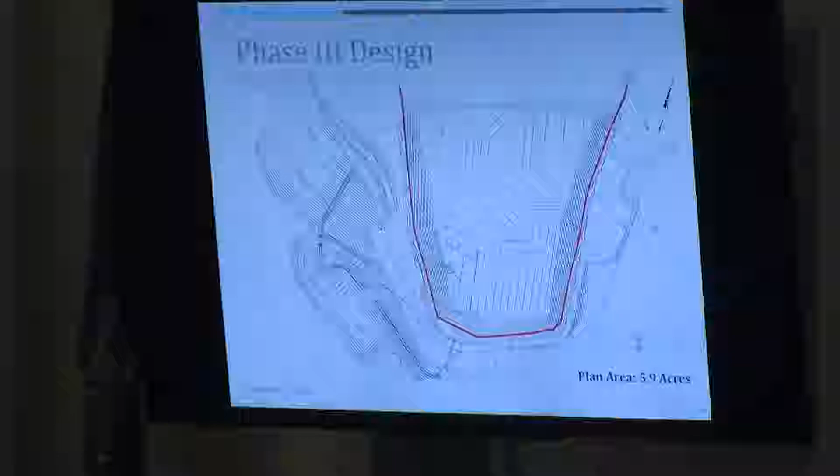What happens if we get approved and we're kind of in the middle and the regulations change? Sure, excellent question. Once you're approved and you have your permit, you're under those rules. If you wanted to make a change to the facility, depending on what the change is, if there's a rule change associated with that modification, then you'd have to follow the new ones. Because we're sending a different amount of water to the pond, we had to upgrade the rules on that. So once we get the permit in hand, we're golden. Okay, thank you. You're welcome.

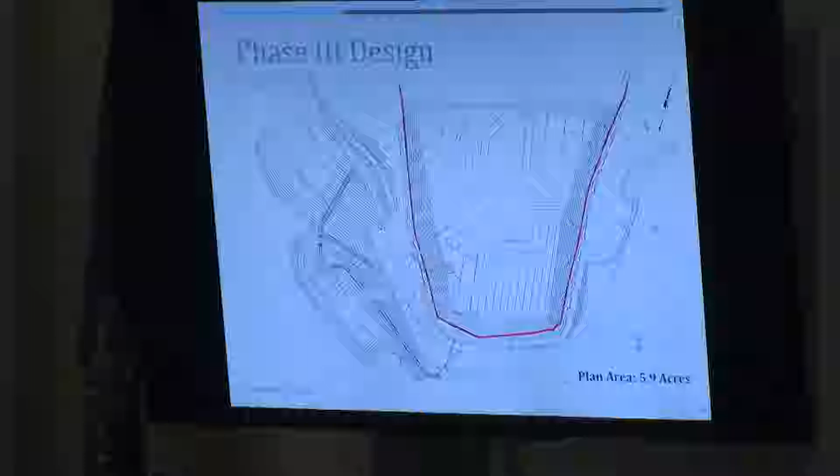And where is the pond that... let me go back, I'm sorry. The pond is here. It's the same location Pond 6 is now—we just had to upgrade it to meet the current rules.

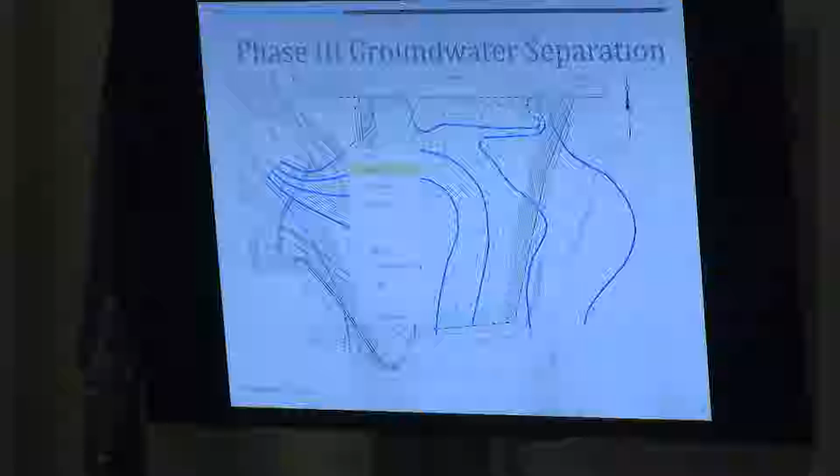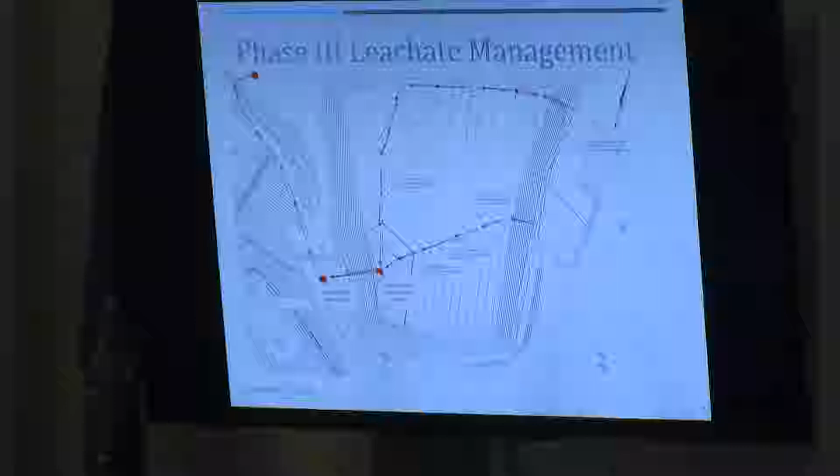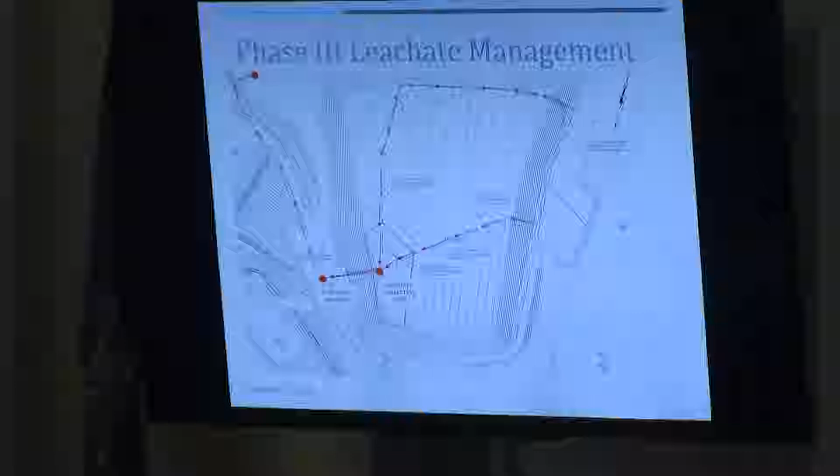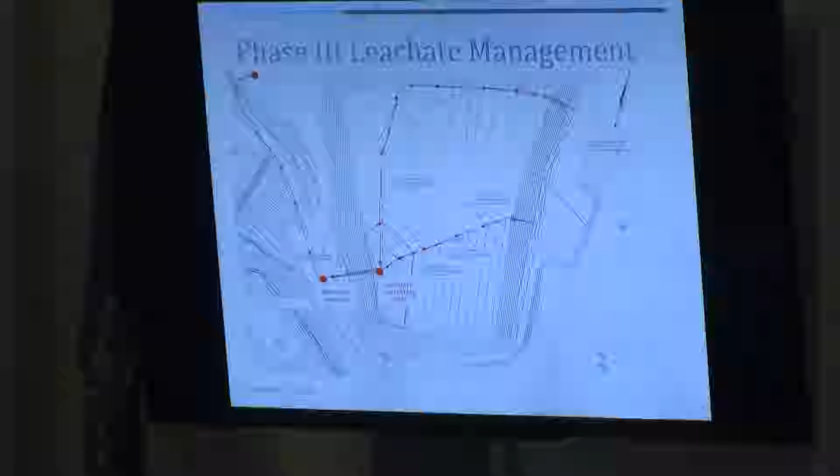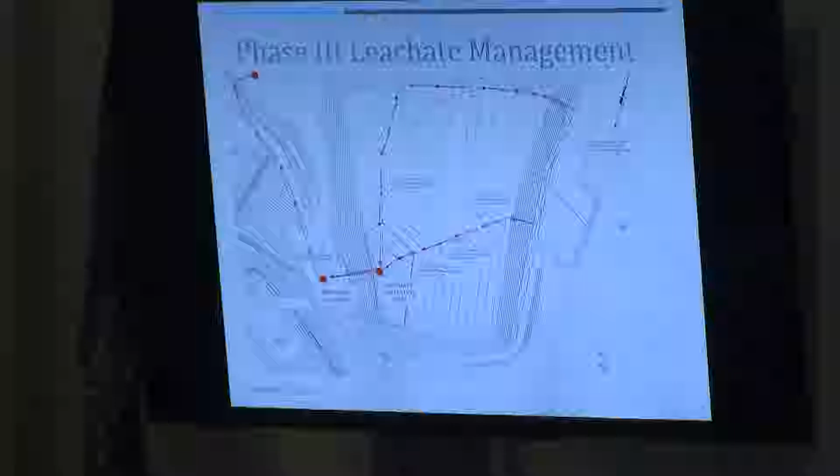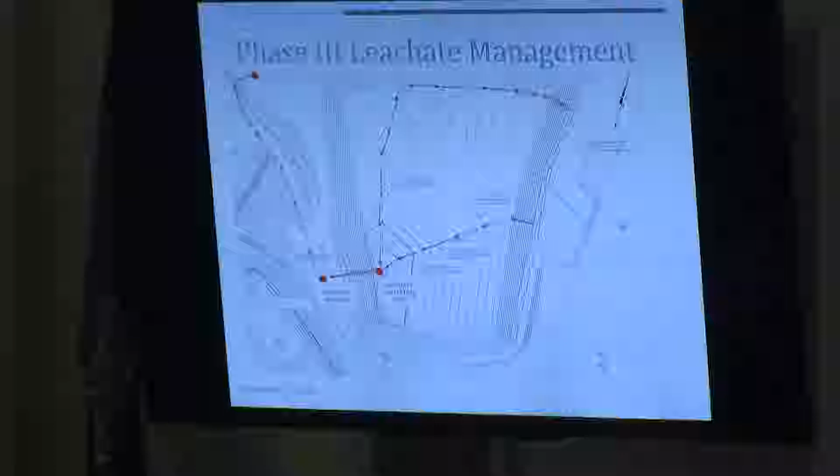The pumping network will pump it all the way up to the top of the hill, where we'd change from the force main pumping piping to a gravity main, and it would drain back in a pipe to this area of phase 2, where there's already plumbing to bring that phase 3 liquid to the existing system. Originally when designed, the low spot was supposed to be in this area, but because of the groundwater, we had to flip the grades to meet the rules. We're still trying to use as much of the existing infrastructure as we can without placing a lot more pipe at the landfill.

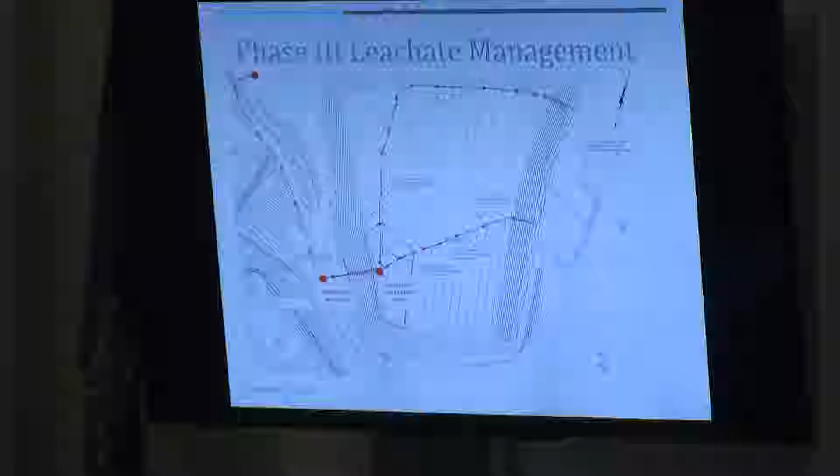So as I mentioned before, we have to have... did you have a question, sir? Yes, very quickly. We're taking, what, rainwater that flows into the thing and pumping it out of the...

So any water that comes in contact with waste, by rule, is considered leachate, and that has to be handled separately than stormwater. Any water that's outside the limit of waste, that doesn't touch waste, is stormwater. Anything that falls within the limit of waste or on the waste itself, we collect as leachate, and they're handled very differently.

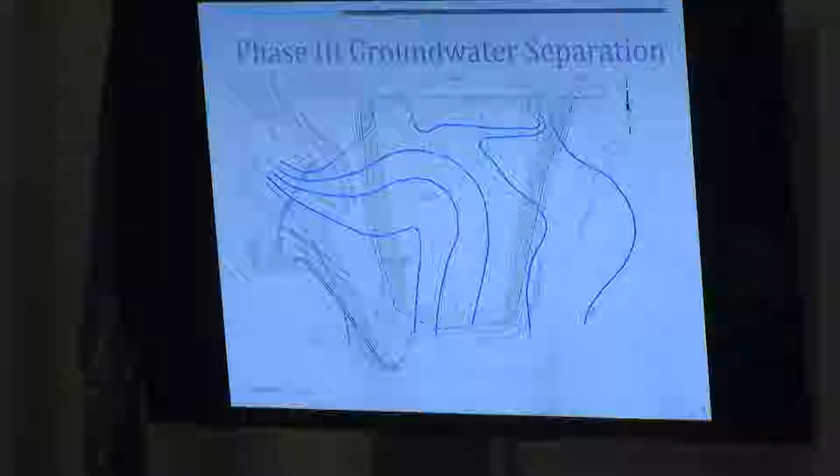This graphic here is the same grading plan we were looking at before. The blue lines represent the groundwater contours, and the green lines are computer modeling to see the difference between the top of that groundwater and the bottom of the landfill, which we have to have a 6-foot separation by rule. So we set up our grading plans to meet that rule.

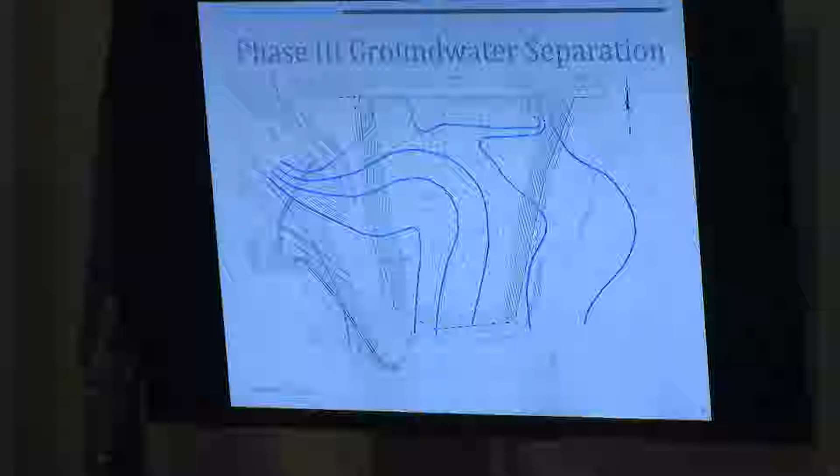It's been a wet year. Groundwater table has risen since we did this, so one of the conditions of the permit is to monitor groundwater and make sure we have that separation. We're in the process, the city's been monitoring that. We have to take that monitoring through June of 2019 and show the state that we have the separation. So the grades might change a little bit to reflect if the groundwater has changed appreciably, to make sure we have the separation.

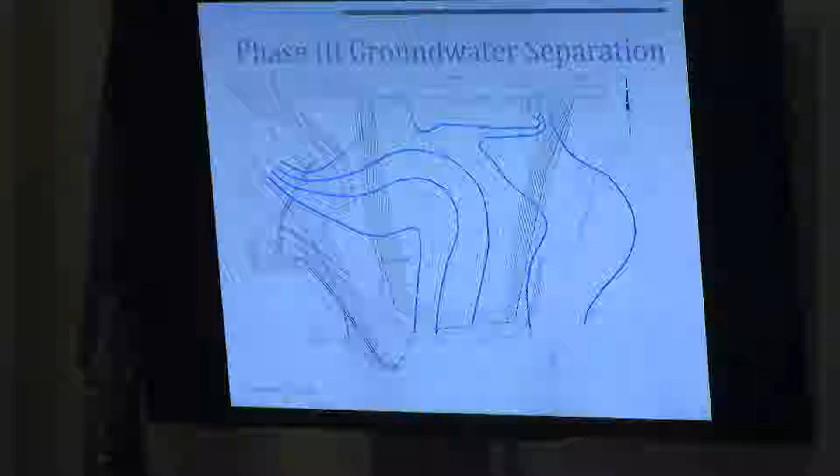Yes, sir, Alderman Jetty again. Can you explain this line right here? So the blue lines are showing the contour of the groundwater. Is that groundwater high or low? Yes, so the blue lines are like topography lines for groundwater.

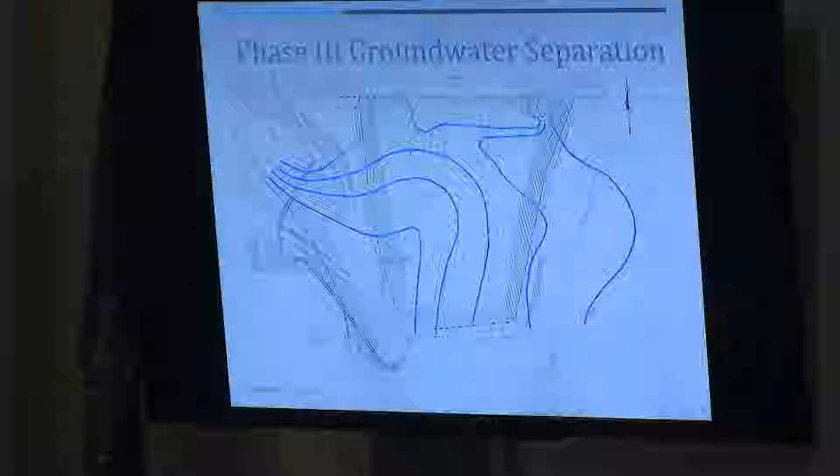So what you have going on is the low of the groundwater is down here. That's why we put our sump there, because we can go down lowest and get the 6-foot separation. These curved lines here are just other 10-foot contour lines of the groundwater, with the highs being off on the edges on either side. So the water kind of flows from the edges into the landfill footprint and then down, so it's all flowing downward.

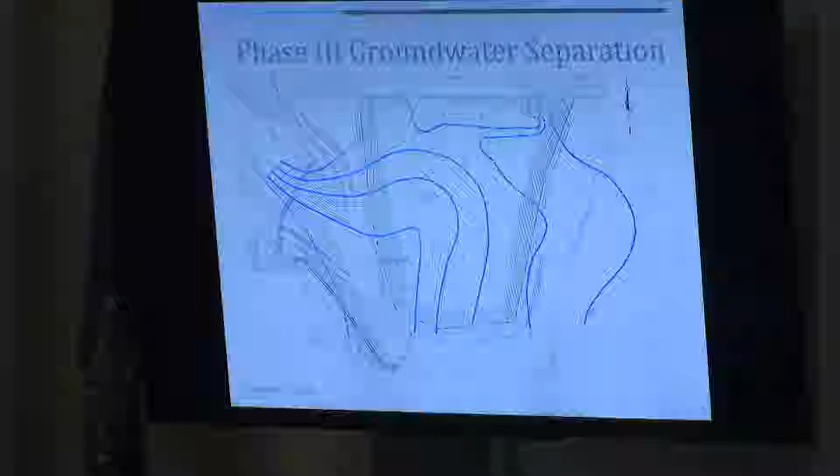The line up here... I'm having trouble following your cursor, I'm not seeing it very well. Where's the low point again? The low point's down here at the sump. Okay, I see it now. Yep, thank you. And those are 10-foot contour lines as you go out from there.

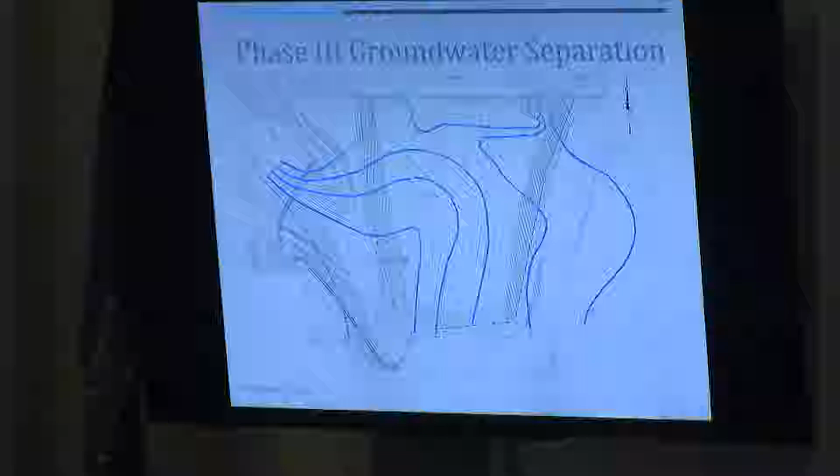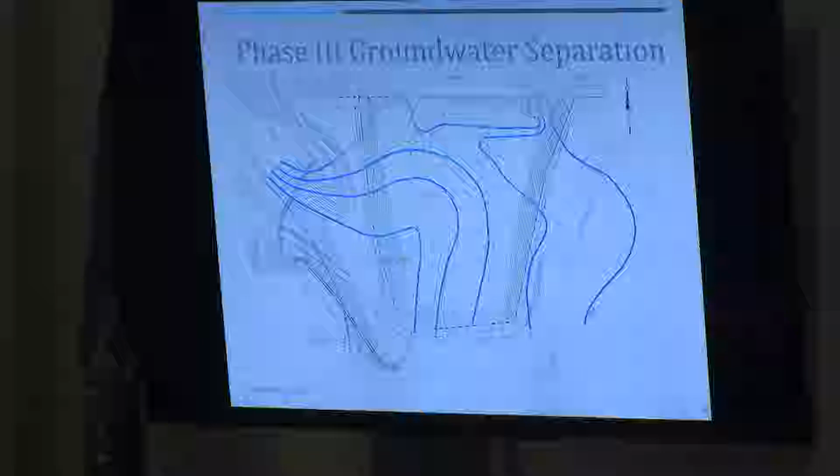So all those yellow dots I showed on several slides ago, those monitoring wells, we gauge the groundwater elevation on a monthly basis, and that's how we come up with the groundwater contours here.

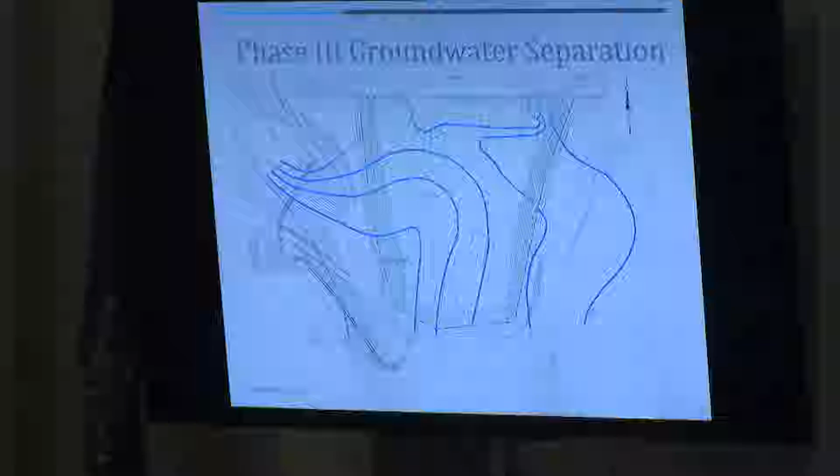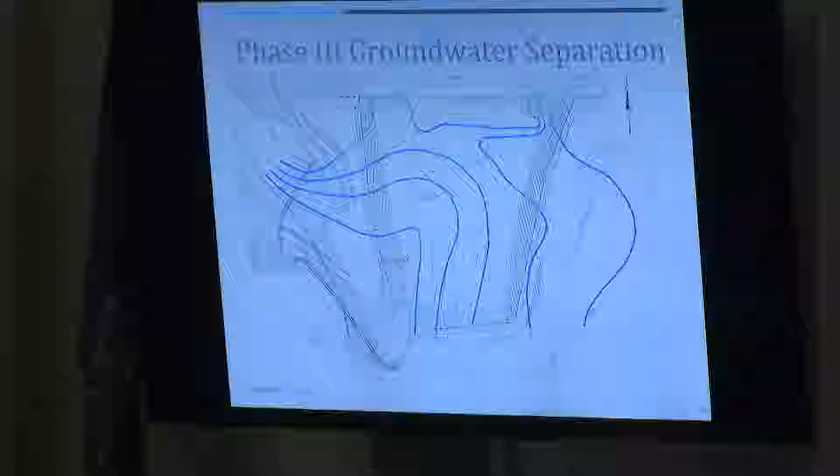And is this within, like if you go down that main road, so when you enter from West Hollis Street, and you go to the back and you take a right, and you go along where the demolition area is, and then you take a left and you kind of go up, where is that? Let me show you, kind of answer that question here.

So phase 3 is bottom right on the page. Alderman Jettie, if you go all the way up the haul road and where we're currently working on the right, up behind that, it will be phase 3, in this area here. Okay, so right behind phase 2 where we're currently working.

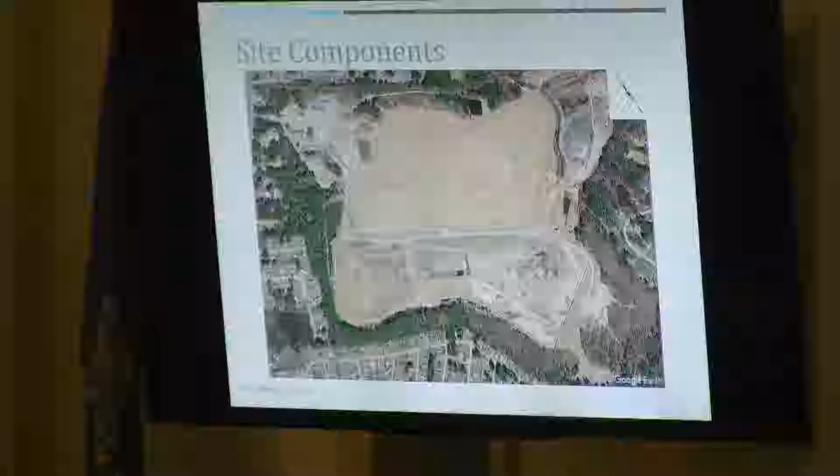Okay, so it'll be behind. That's not very far from those houses on like Pioneer. Right, that's why... let me just go a little bit here. Actually, it was probably better back here.

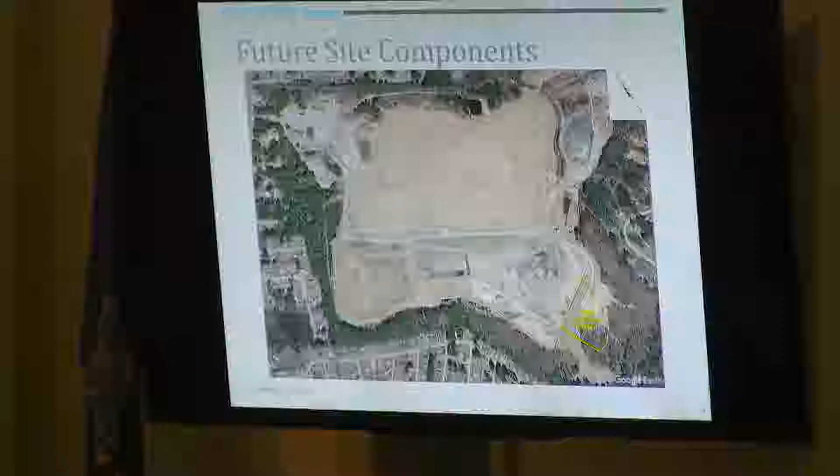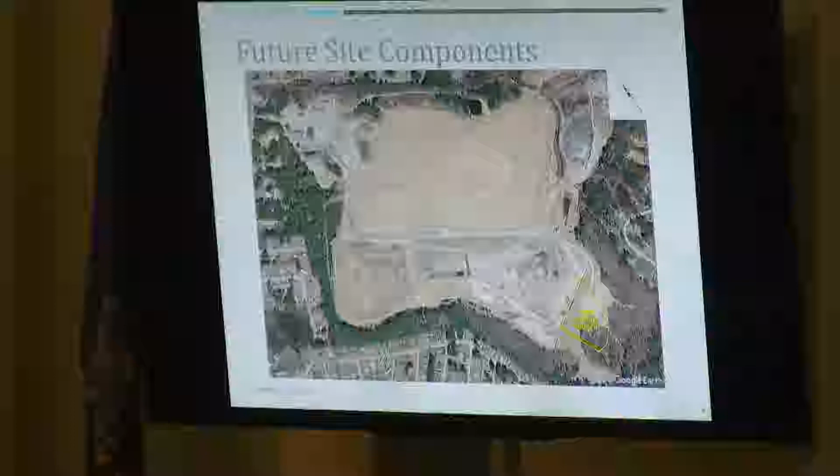So those yellow lines, for phases 1 and 2, represent the 500-foot setback from those houses. If you continue those lines down here, that's the boundary for phase 3. That yellow line is the 500-foot line, the edge of waste we'd be allowed to place, which is 500 or more feet from the residences. That's a state requirement.

Phase 4, right in the middle of the site, is well away from the 500-foot setbacks.

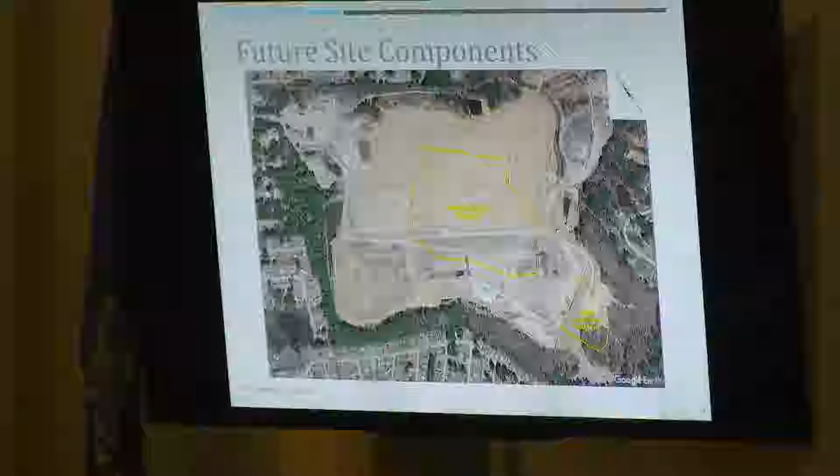When it was originally permitted, phases 1, 2, and 3 were permitted as one package. We're modifying it to adjust for that vertical wall issue, which I'll show in a second, as well as for the groundwater table.

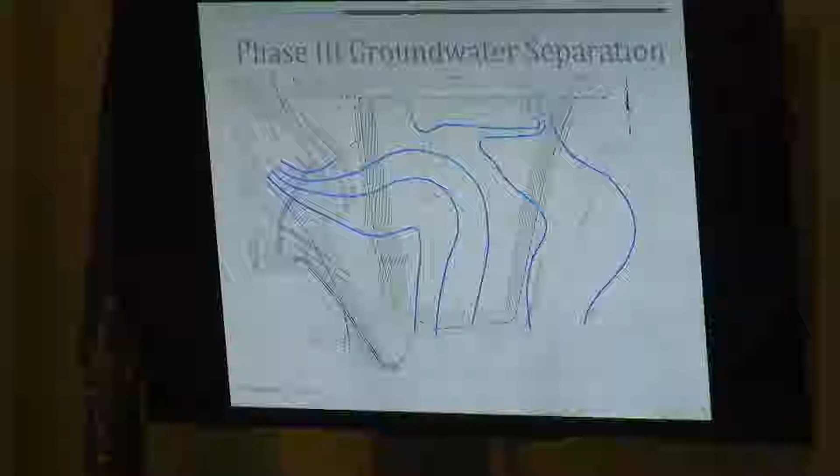So onto how we're going to build this. It's a pretty straightforward landfill construction project. Some earthwork, and then we put down synthetic materials for barrier and drainage layers. It's multi-level, 2+ feet thick in total, with a perimeter berm around the outside constructed out of soil.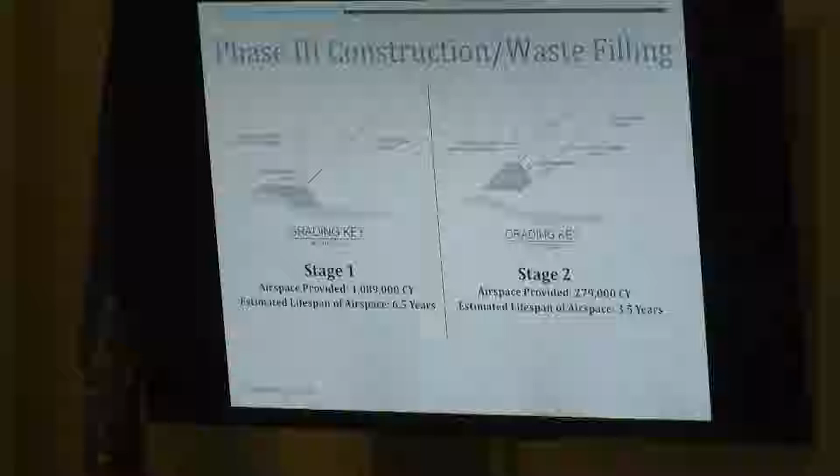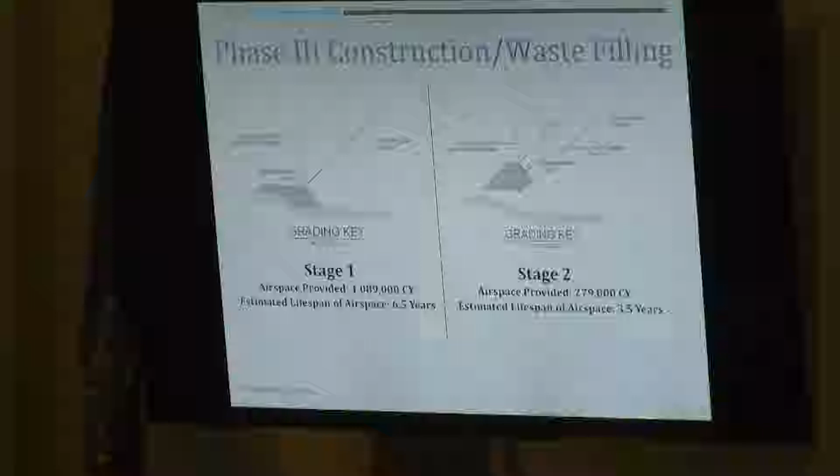Thank you. Great. So stage 1 would be built this summer, and that's that 6-acre area within the 500-foot setback. There's just over 1 million yards of airspace for disposal capacity based on where the bottom of the landfill is and a 3-to-1 side slope from our berm, that box we'd make. Based on your current disposal, your waste stream coming in, and the compaction efforts we're able to give it, that's about 6.5 years of capacity there.

About 5 years out, after you start filling it, we'd go to stage 2. Stage 2 builds more soil berm along the outside, and we'll place more liner material so all the waste stays inside that limit of waste, this dashed line you see vertically here. You get another 280,000 cubic yards, or another 3.5 years of capacity. The construction there would mostly be the soil berm and some more liner system, but not as extensive as the construction we're doing this year, which has the pumping systems, all the piping, and the pond that goes with it.

Quick question. Commissioner Ackerman: 1 million cubic feet lasts 6.5 years, but 280,000 lasts 3.5 years?

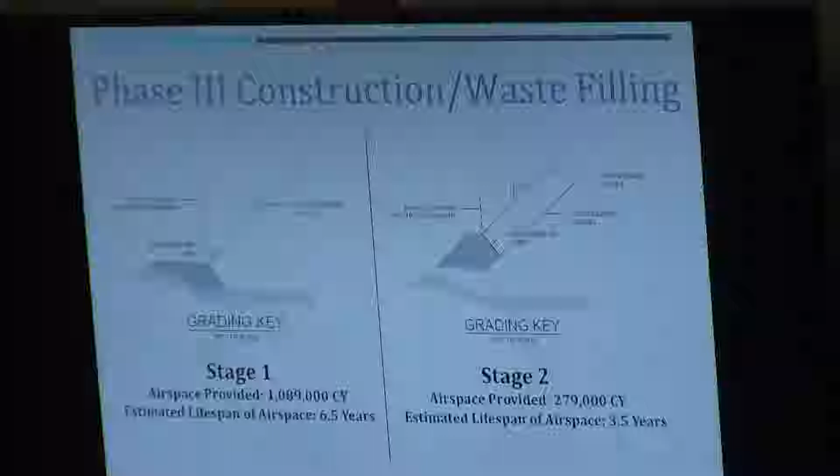Cubic yards. Yeah, that's because as you start a new landfill, your first lifts are placed looser because you don't want, we call it select waste, we have to be protective of the liner systems. You don't get as good compaction in the early years because you don't have the thickness of waste. As we go longer, you get settlement of the waste, it settles down, so you're getting some of that capacity back. We look at what we call an airspace utilization factor, doing math based on your tonnages and the historic placement we've seen. Every time you open a new cell, your compaction isn't as good, and as you go through the years, it improves over time.

Yes. And all these phases are going to be included in the permit that we're going to receive? So the original permit included phases 1, 2, and 3.

The way the state works, when you're ready to build the next phase, there's another application for construction, called a Type 2 permit. Phases 1 and 2 are built, they're active. Phase 3 we didn't need yet, so you don't build what you don't need. But capacity is running out in the landfill, so we need to get it built.

To get permission for construction, there was another permit application to modify the original one. So that's what we did. We prepared an application over a year ago and went to the state, showing the modifications we're making to bring everything up to current code. Because we are modifying it, we had to go through alteration of terrain with the Department of Environmental Services as well. So all those permits are in hand.

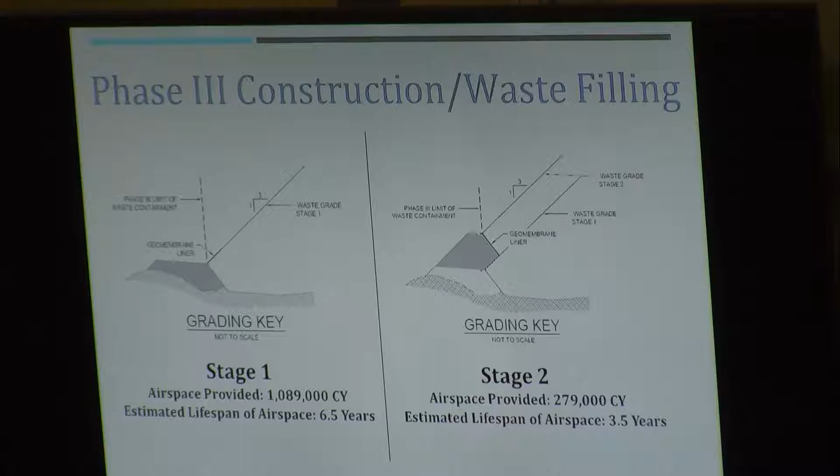Thanks for the clarification. It sounds like they switched their rule, and I understand they have to. So if we get 1, 2, and 3 permitted, like our permit's for, how many years will that buy us? Phase 3 gets you an additional 10 years. I don't remember how much we have left right now. 4 to 5 years. So you'd have 4 to 5 years left if you didn't do anything, and phase 3 gets you another 10.

You need overlap between phases because, like I said before, you want to select the waste that goes on the new liner systems, since you want to be protective of the materials you spent a lot of money to construct. You also want overlap between phases so you can properly move your machinery and have good operational control. So most of our clients look for a year overlap at a minimum. You don't want to build too far in advance, but you want operational security in how you run your landfill.

Brief follow-up question, Commissioner Ackerman. Mr. Steinhauser, looking out beyond phase 3 and phase 4, how many cubic yards? I'll get into that in a moment.

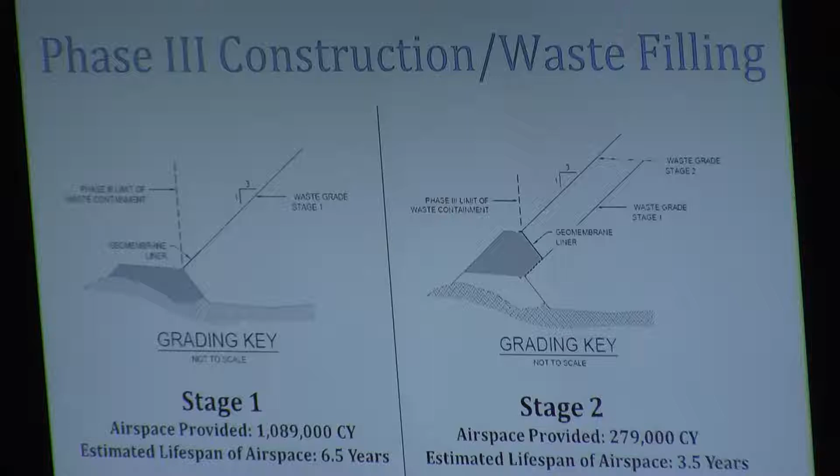Fair enough. What's nice about the phase 3 design is that you build one project now, and in 5 years you build another project, and the city doesn't have to deal with periodic vertical wall construction, because we'd build that perimeter extension in one construction season. Right now they have to put in these vertical barrier walls as they go, and it's disruptive, it delays things, and it hampers how they can do work. Part of our job was to get you as much space as we could and make it operationally positive for the operators.

I brought show and tell materials. In New Hampshire, the rules require a geomembrane material. I have two types to show - two different manufactured materials for that. This is a 60 mil thick, high density polyethylene material. That's what every site in the country and internationally uses. It's textured, for slope stability issues so we don't get sliding of the material. There's a primary geomembrane and a secondary one.

So when this gets built, they'll do earthwork to grade the site to where it needs to be. We'll place a 6-inch thick layer of a low permeability, very dense material. On top of that will go the first layer of this plastic material, and on top of that will go a drainage material - it's kind of like carpet with a drainage net in between.

The textile helps — if you were to put it up against that frictioned plastic, it holds very tight, and that allows water to move through it so we can collect it in the sumps.

On top of that is the primary geomembrane, and then another composite for the leachate directly from the landfill. Then there's a 2-foot thick sand layer, an 18-inch thick sand layer above that, and then waste is placed above that. In the sump area, we have another material, kind of a belt and suspenders.

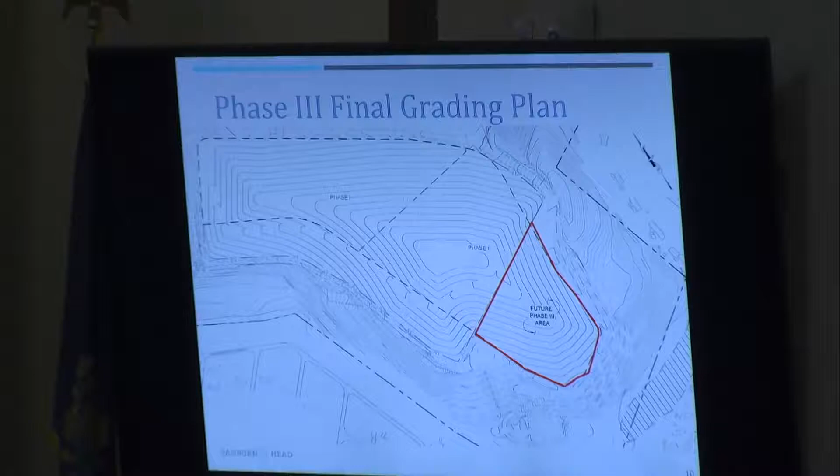Depending on how much waste there is, how dry the waste is, how much rain has happened — the more rain and snowmelt you get, the more liquids are going to come to the sump, the more pumping there would be. The drier the time, maybe the drier the waste, it doesn't pump as much. But it's all automated, and the operations staff can see the operations of the pump and when it's working. There's another level that says if the level gets too high in the sump, maybe the pump hasn't kicked on — there's warnings that go off so the operations staff can pull the pump, put down a replacement, or repair it and make sure things are working.

Yes, sir, Alderman Jettie again.

Has any thought been given to producing our own electricity to operate that, with solar or whatever? We haven't for this project. It's a possibility, a little outside my expertise, but sometimes it's cheaper to buy electricity than to generate it yourself, like at a gas plant where you sell the power back. It's often cheaper to buy it than use it internally. If you make electricity, sometimes it's better to sell it and buy off the grid. I don't know all the economics, but if the city wanted to look into it, we could direct you to people who can help. We didn't look at self-powering those pumps though, they're not real high energy use pumps.

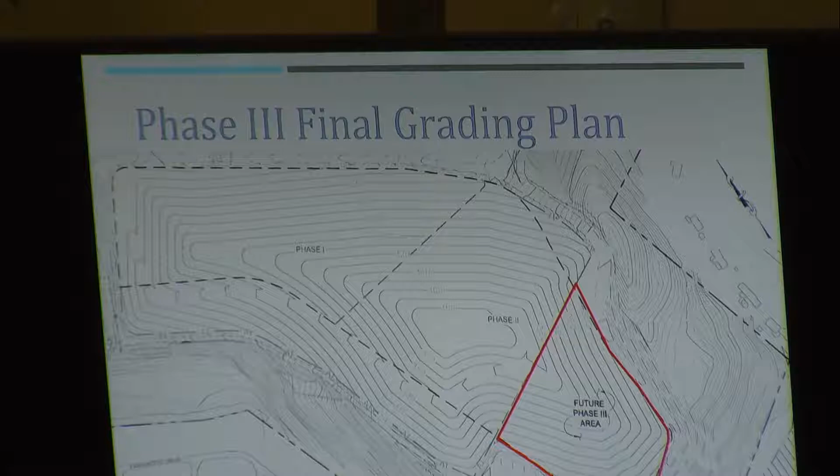Phase 4 would overlay the large unlined closed landfill and a portion of Phases 1 and 2. That application is in process, we're finishing the design work. This would be a new landfill, so it requires a new permit, not a modification like Phase 3 was. We're preparing all aspects the state would want: engineering design, the hydrogeologic environment around it, the stormwater design, and more, all in motion now. Our estimate is 3 to 4 million cubic yards of space. If you've been to the landfill and gone down that road, there's quite a valley, and this overlays that valley.

That's all I had prepared on Phase 4, but I'm happy to address questions. Anybody have any questions? Certainly.

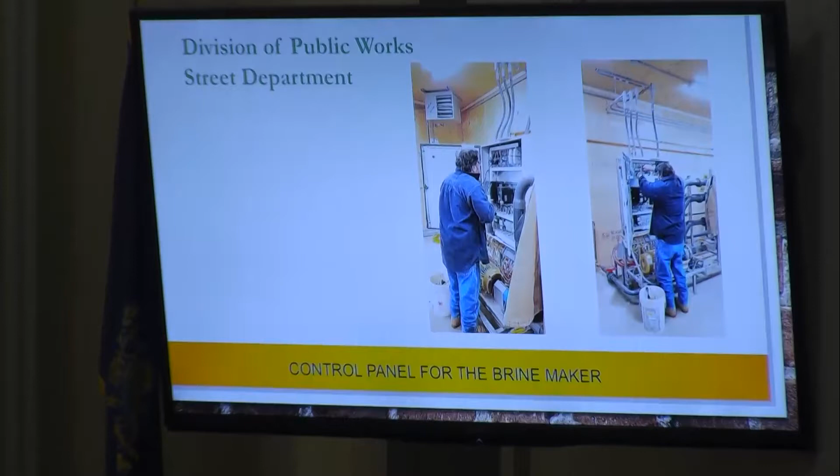This is Eric Gingras, our wastewater electrician. We built this whole project with street and wastewater and actually school department staff. Gary Connors was kind enough to work with me and supply Lyle Samard, who did all the plumbing for the facility, which kept our costs down. And Dave Boucher, wastewater superintendent, was able to part with Eric.

We had to work around their schedules. Obviously, wastewater has to stay operational, but every time I could get him out, he'd come out and work on this for us. That control panel he was working on in that slide, that's the component that Henderson is rebuilding and sending so we can program that machine.

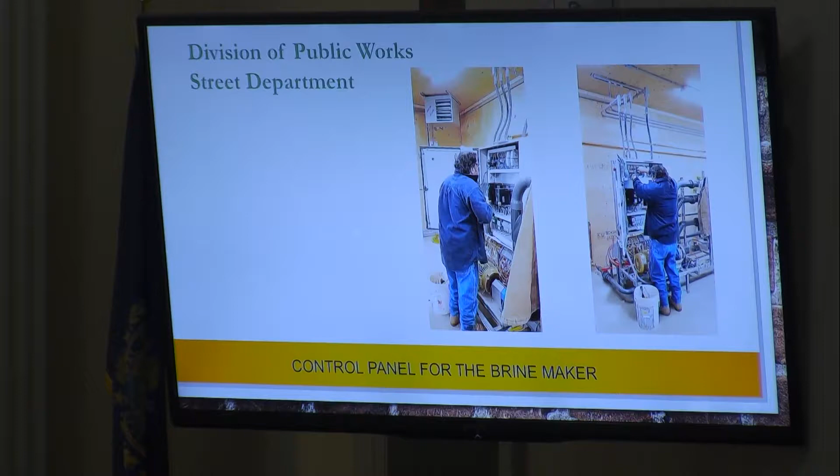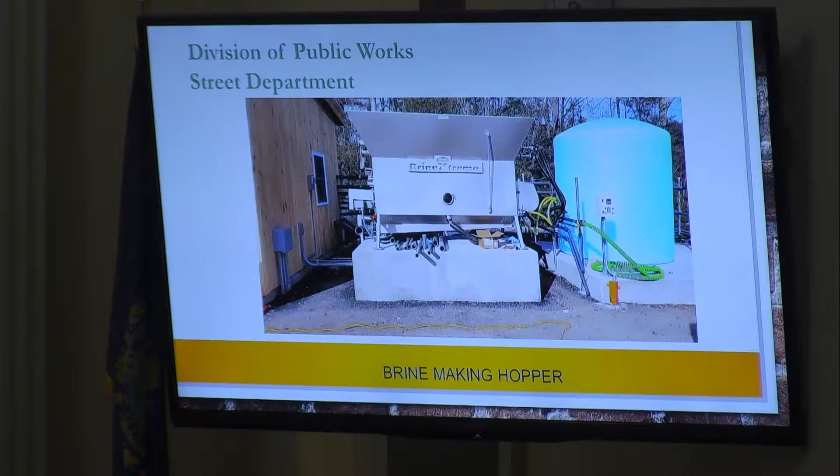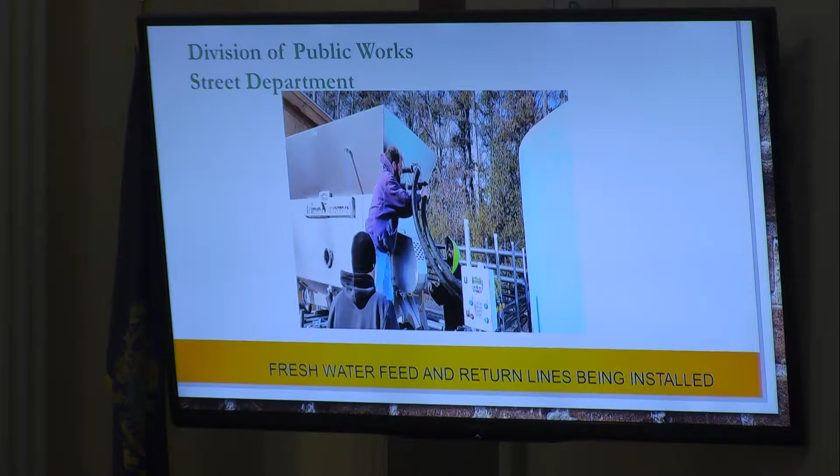That's the guys doing the return lines and the fresh water feed, and that control box down in the lower portion of the picture, that's one of the truck fill stations where a driver will pull up, hook up the hose, program his truck number in, and how many gallons. And that is the tank farm with the 3 truck fill stations, one on either end and one in the middle.

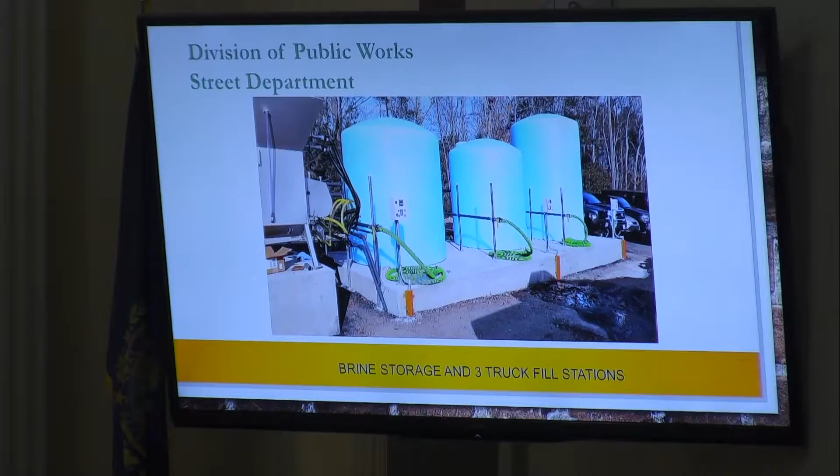And that's it. I just wanted to kind of bring you up to speed a little bit on that. We've been anticipating it. I thought for sure we'd be making brine by now. A few delays, holidays, a few weather events, and then this debacle with Henderson. But they're standing behind their product.

I had one other failure when we were circulating water. That hopper, the stainless box, had a few leaks. They're also assuming the expense of a certified welder to come out here and make those repairs with some reinforcing gussets. So that'll all take place shortly.

Any questions? Just a real fast one. Water freezes, so after you're done with a storm, does water still stay in those tanks over there, or do we just purge? That will be brine, so it'll be mixed at a 23.3% salt solution, and we will have circulation going on. So that will not freeze.

The plumbing is phenomenal. When you come out, I'll walk you through it. They have blow-offs, the compressor shoots purges of air to blow out any standing water. We had Lyle build in some gravity drains so we can drain everything. It's amazing, it's a nice project.

You know, Superintendent, it makes me nervous looking at those pictures of the control panels being exposed though, 24/7, all year long. Can't we have some kind of cover for those? We didn't get there yet. I had the same thought, actually. They are a weather-type panel, but yes, I intend to enclose those.

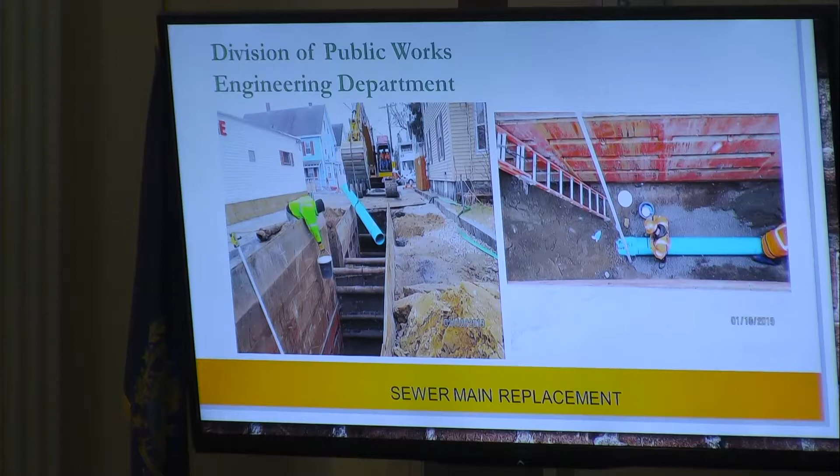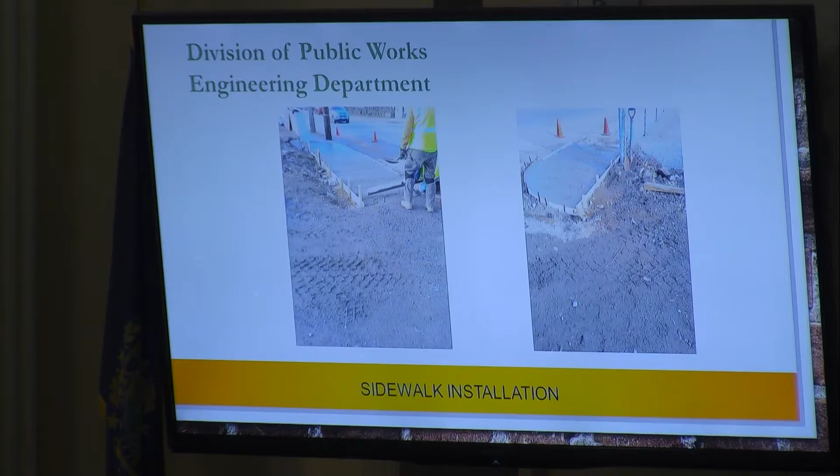We're very excited to announce, the mayor announced Sunday that we received a Transportation Alternative Program grant for Lock Street. It's $800,000, and we're going to be adding sidewalks, bike lanes, trees, and traffic calming measures. We're very excited about this project. Neighbors came out to hear the announcement and they're very excited. This will be a really great improvement to this neighborhood. It'll also include the potential of making Lock and Whitney both one-way instead of two-way so that we can make these improvements. A lot of this was driven by safety.

We can't effectively clear these sidewalks right now because there were so many obstructions and they're narrow. I'm sure you've all seen children - we have a safe route for them to walk up Summer, but they don't do that. As we all know, kids will follow the path of least resistance, so they tend to go right down Lock and walk in the street, and it's a very unsafe situation. So we're really excited to get this project underway. It's going to take a little time because there's still a number of hoops since it's a grant, but we hope by October of 2020 we'll have the improvements made.

So, did you want to add anything to that? Pretty exciting project. I was very excited to read that.

We talked a little bit earlier about Eversource and the trimming that they were doing. It was brought to our attention by some residents that were very concerned, one of them on Raymond Street. We immediately had Kim Kleiner, the mayor's chief of staff, call a meeting with Eversource. We met with them and told them of our concerns. We have asked them not to trim or cut any more trees on Raymond, Cortlandt, and Tolles for now. Actually, one of the trees that we just planted ended up getting cut down, so we were very concerned about that. Eversource was very responsive in their defense - they have a critical network of power lines they need to keep clear. They're required by the PUC to do that, and also they want to make sure we don't have power outages here in Nashua. So they're trying to do the right thing, but trees can be very sensitive, especially mature, beautiful trees, and they are required to get homeowner permission, even with trees in the city right-of-way. The homeowner needs to sign a document saying that they can trim or cut the tree.

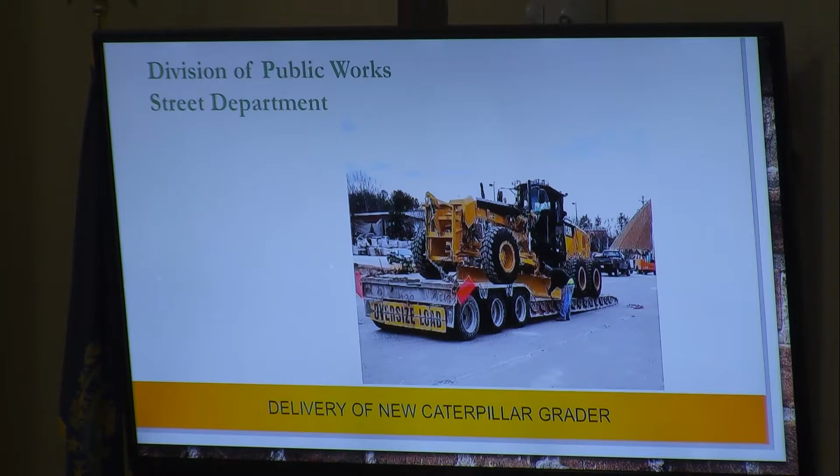We received our new grader at the street department, very excited about that. That's going to be a very useful tool for us for both plowing and grading roads and any fields or soccer fields that we're trying to build. That was purchased with part of the 1.3 million that we received from the state that the governor gave back to communities, so that was a really great thing.

We had our first big storm of the season on January 20th, which was hard to believe. This is operations on Broad and Amherst.

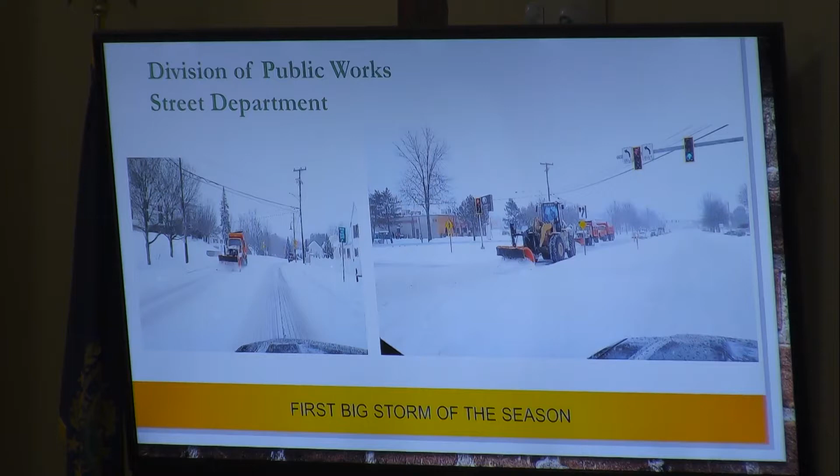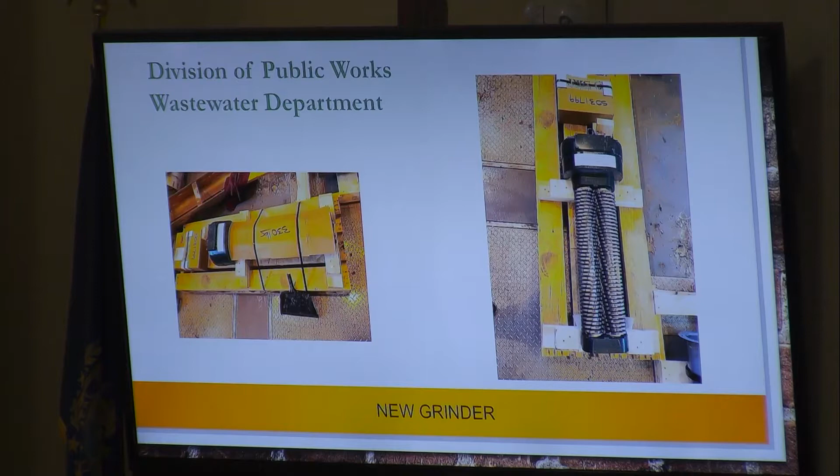This is a new grinder that we received for wastewater. This helps us grind up rags and plastics and other things before they make their way through the process. It's located at the bottom of the digester.

We've been doing all sorts of miscellaneous plumbing repairs at wastewater, including new faucets in the laboratory and a new eye wash station in the wet well. Just wanted to highlight some of those things because it's a very caustic environment, so we're constantly having to replace routine things like that.

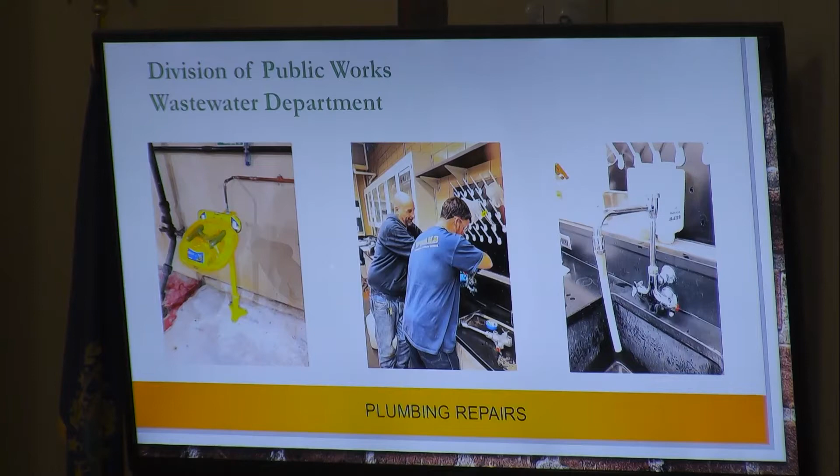We had, you probably remember, on January 24th, all the flooding that we had. Of course the ground's frozen, we have snow on the ground, so there was nowhere for water to go. We had some problems, but our crews did a really good job of trying to keep everything flowing.

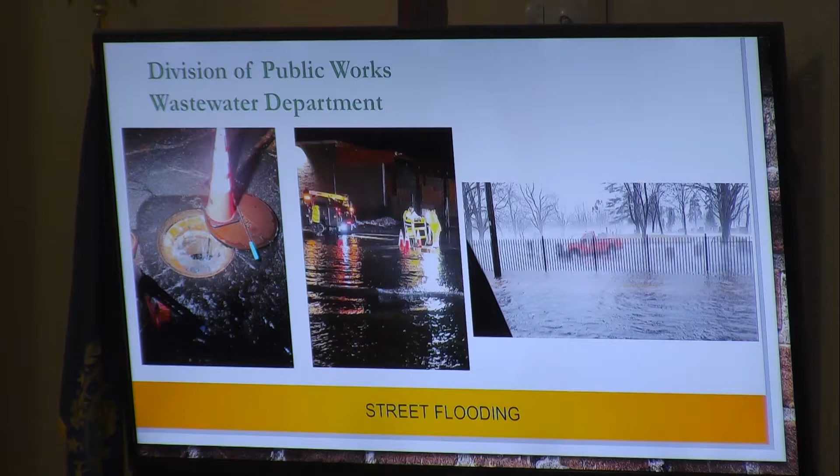That's probably the worst thing you can have happen in the winter, to have all that rain. Yeah, it just has nowhere to go.

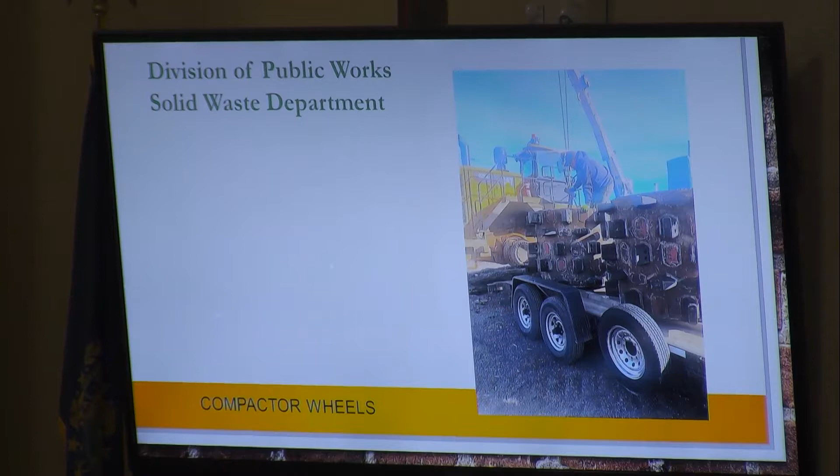These are new, our compactor has new teeth on the wheels. This is something that we want to always replace, keep the teeth in good shape so we don't have any problems with the wheels, because otherwise we're replacing wheels, which is a lot more expensive.

We have the 2019 hazardous waste collection schedule already out, and most of the dates will be at the street department this year, with the first one starting on April 20th. We'll update you as those come along.

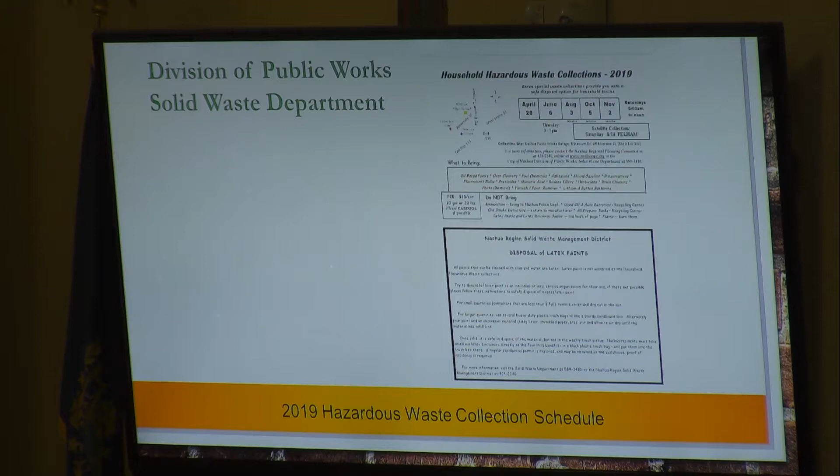The Four Hills landfill will be closed on Monday, February 18th in observance of President's Day, so trash that week will be delayed a day.

I think that's it. Any questions?

I just wanted to point out, I think the department's doing a great job on the social media presence. I think the communications are really good, and if you pass that on to Lauren. I will, Lauren's doing a great job, we're really lucky to have her.

I also had a question, I should have brought it up in the previous tree discussion. On the Henry Burke Highway, because technically it's east, but north of the bridge as you head towards Concord Street, on the right side on Cabot Road, there's a home, and I'm not sure who took down these trees, but there are a bunch of trees, and it just doesn't look right.

It's a pile of tree stumps, not even cleanly cut. Looks like a tree fell over and snapped, but my concern is it's getting close to the road, and I don't know if we should take a look at that from a safety standpoint. I'm not aware of that. We'll absolutely take a look.

I think there was a big fire there a few years ago, and it's horrible looking. I think it's on Henry Burke Highway - I don't know if it's state land, but it's an eyesore. I think it was during a time someone threw out a cigarette butt, or there were some suspicious fires that kids may have set, though they never found out. I don't know if it's the same exact spot, but a few of them are awful.